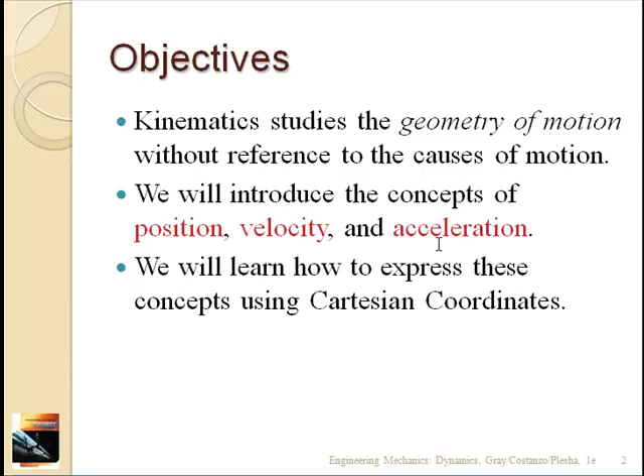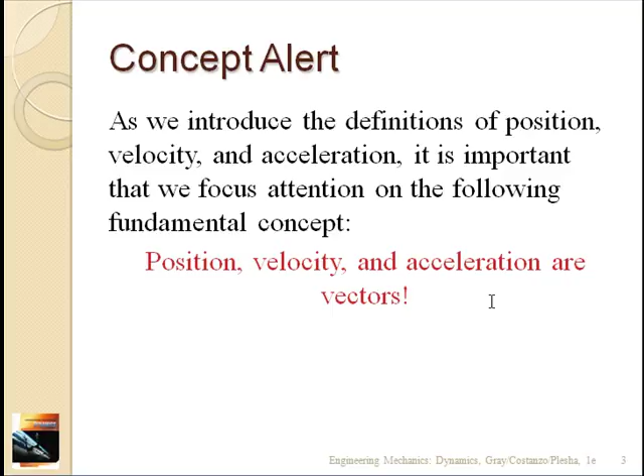So kinematics studies the geometry of motion. So really what we want to be able to do is determine the position, velocity, and acceleration of any particle. And one thing to keep in mind is that these are all vectors. So they all have a magnitude and a direction. So the position of a particle, its velocity, and acceleration all have magnitude and direction, and you have to keep that in mind. We'll talk about speed later, and speed is the magnitude of the velocity. So speed doesn't have a direction, but velocity does.

Now we're going to need to deal with time derivatives a lot. The derivative of the position vector is the velocity vector, and the derivative of the velocity vector is the acceleration. So we'll deal with those constantly. So we just want to get the notation right. So if we have some function f, df/dt we'll call f dot, and that's the first time derivative. The second time derivative is f double dot. The third time derivative is f triple dot, etc.

So let's start with the position vector. So the position vector is provided in some kind of coordinate system. So in this case, we'll have an xy coordinate system with unit vectors i and j in the x and y directions respectively, an origin at point O. And we want to be able to describe the position of a particle at any time. And so what we use is this vector from the origin to the particle, and it's a function of time. So if we know this vector r as a function of time, we'll be able to identify the position of the particle at any time. And if we can do that, and we can take some time derivatives, we'll be able to specify velocity vectors and acceleration vectors just by differentiating the position.

So r is our position vector for particle p. If we want to break that into the horizontal and vertical components, x sub p is the x coordinate of the position vector, and y sub p is the y coordinate. So this position vector r can be broken up into the x and y components, x sub p of t multiplied by the unit vector in the i direction plus y sub p of t multiplied by the unit vector in the j direction. Okay, so x sub p and y sub p are the coordinates of p. If we want to know the distance from the origin to the particle at any time, we can just take the magnitude of the position vector, which is the square root of the sum of the squares of the individual x and y components.

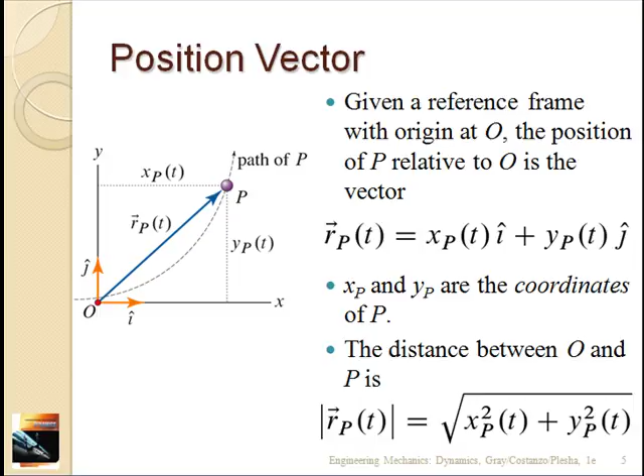So then we'll talk about trajectories. So the trajectory of a point is the line traced through the space point by point. It's sort of like if the particle leaves a trail as it moves, then that would mark out the trajectory. Okay, so the position vector is a straight line from the origin to the particle, but the trajectory is the path it takes to get there. So if we just know the position vector at a specific time, it doesn't tell us anything about how the particle got there, but the trajectory does. So this dotted path is a trajectory, and if we know what that is, we can kind of trace out in history where the particle has been. Okay.

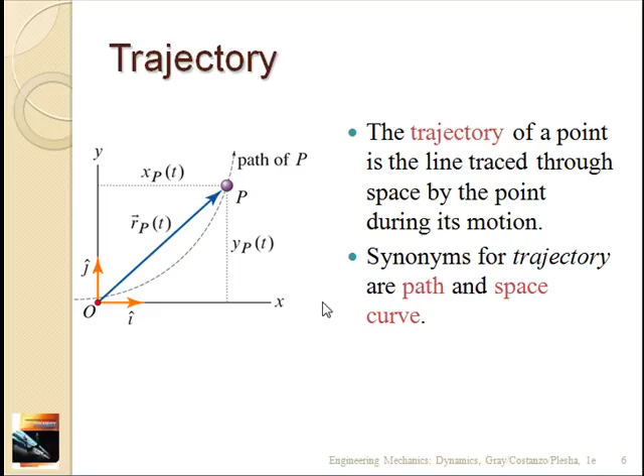So now we'll talk about displacements and average velocity. So the displacement between two different times is the change in position, right? So if we look at this particle p, at time ti, particle p was here. At time tj, particle p has moved to here. So we have position vector r of ti that denotes this position, and r of tj, which denotes this position. And the displacement is the change. So it's this delta r here. It's the vector connecting where it was at ti and where it is at tj. Okay, so the displacement just tells you the change from one time to another. It doesn't tell you again how it got there. So if this was our trajectory, the displacement vector is independent of that trajectory. It's just the vector between these two positions.

All right, so delta r as a function of two times, ti and tj, is the change in position or the difference between the two position vectors. The average velocity over that time period is the displacement or the change in position or the distance traveled divided by the time, right? And the distance traveled, because we just draw this straight line between these two positions, is delta r. It's just the change in the position, right? So delta r here divided by the time it took to make that change, so tj minus ti. So it's like delta r over delta t. So that's the average velocity.

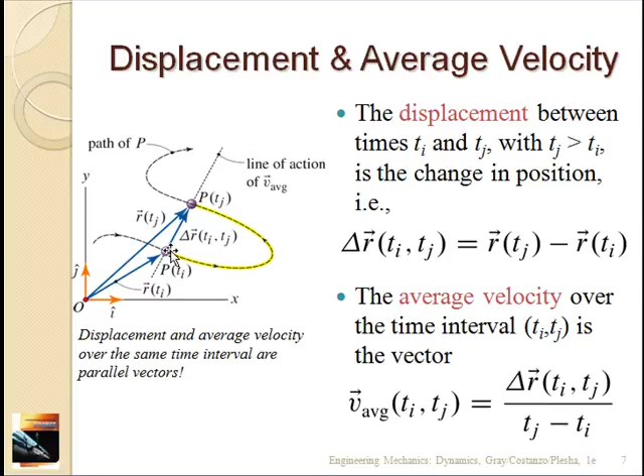Okay, so the distance between the two positions, p of tj and p of ti, is the magnitude of the displacement vector. Okay, so it's the magnitude of delta r. So the distance traveled during the time interval is the length of the yellow curve, right? So the displacement is just this delta r, but the distance actually traveled has to take into account the trajectory, and it's the length of this curve, which is highlighted in yellow here.

Okay, so that's the distinction between displacement and distance traveled. Displacement is just the straight line, it's a change in position from one time to another. And the distance traveled takes into account how you got there, and it takes into account how far you actually traveled.

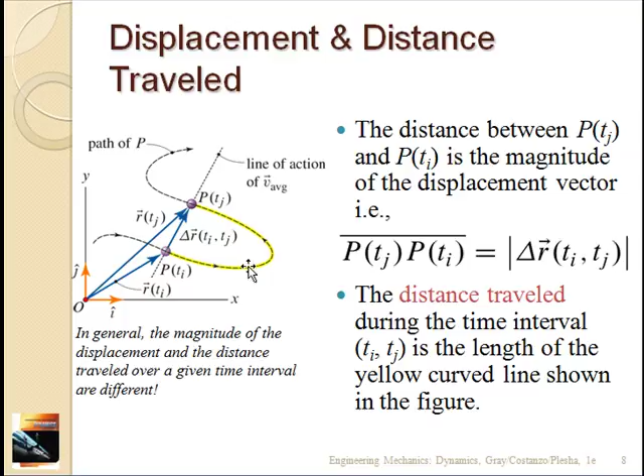So the velocity of the particle is defined as the limit, as delta t goes to 0, of the average velocity between some time t and some later time t plus delta t. Okay? But if you look at the limit as delta t goes to 0, then this displacement or this trajectory will be a straight line if delta t is small enough, or can be approximated as such. And so if you work it out, the velocity is just the time derivative of the position, okay, or r dot. I said that before, but now we have derived it, at least in a crude fashion.

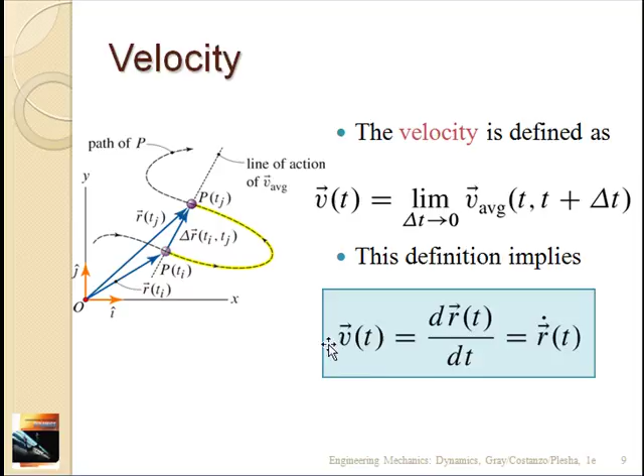Okay, so the main thing here is that if you know the position vector is a function of time, you take the time derivative and you get the velocity vector. Remember, velocity is a vector, so it has magnitude and direction. Okay, and so speed, as I said earlier, is the magnitude of the velocity. So speed tells you how fast you're going, but it doesn't tell you the direction. It's always positive. Okay, so speed is a scalar, velocity is a vector.

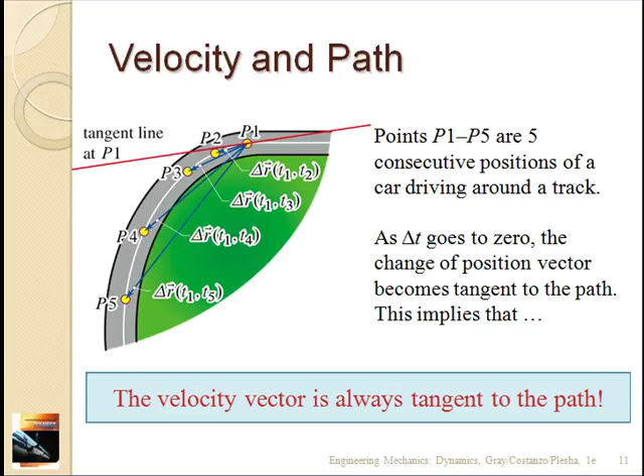And if you just think about the limit as the change in time goes to 0, you'll notice that the red line represents the tangent to the curve, and the change in position will be along that tangent. So the moral of this story is that the velocity vector, which is proportional to that change in position, is always tangent to the path. So if you're going around a curve at any point, the velocity vector is tangent to that trajectory. And that's an important thing to remember as we go through all this.

So once we work out velocity, then we're interested in the acceleration. Acceleration is the time rate of change of velocity. Since the velocity is a time rate of change of position, then the acceleration is the second derivative of the position. So if we know the position vector is a function of time, one derivative gives us velocity vector, two derivatives gives us acceleration vector. So we can write this as v dot or r double dot.

Don't forget acceleration is a vector. And the thing to note here is the acceleration is generally not tangent to the path. So velocity always is tangent. Acceleration is generally not. It can be, but it isn't necessarily.

So let's look at a simple example. So we have an XY coordinate system here and some particle P which is traveling on the trajectory denoted by this dotted line. So this is the path of particle P. And at points A, B, and C, the velocity vectors are noted. So right here, the velocity is tangent to the path, and so it's in this direction. At point B, it's tangent, so now it's in this direction. At point C, it's tangent, it's this direction. Somewhere over here, the velocity vector would be perfectly vertical because the tangent is vertical.

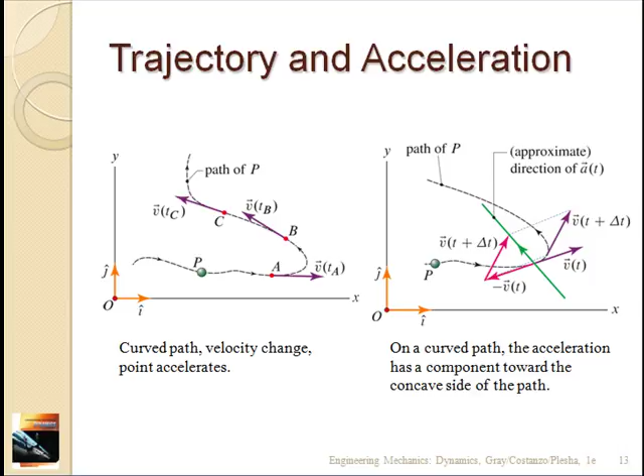All right, so we can work out velocity, speed, and acceleration in Cartesian coordinates. If we know x of t and y of t, the x and y coordinates of the position vector, then the velocity is just x dot times the unit vector in the i direction plus y dot times the unit vector in the j direction. Quite often we'll call x dot vx, the x component of the velocity, and y dot vy, the y component of the velocity. So the velocity vector can be written as vx times the unit vector in the x direction plus vy times the unit vector in the y direction.

So the speed is just the magnitude of this vector, the square root of the sum of the squares of the velocity components in the x and y direction. We can write those as x dot and y dot, so it's the square root of x dot squared plus y dot squared. The acceleration is x double dot times the unit vector in the x direction plus y double dot times the unit vector in the y direction, which is vx dot times i hat plus vy dot times j hat, or ax times i hat plus ay times j hat. So it's the acceleration in the x direction times the unit vector in the x direction plus the acceleration in the y direction times the unit vector in the y direction.

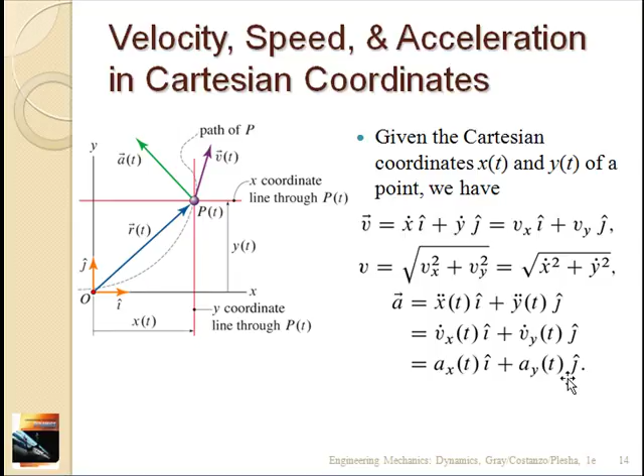So let's do one quick example to walk through some of this. The idea here is we have a couple of ships in the ocean. There's ship A, oriented with the x-axis in the A coordinate system perpendicular to the ship and the y direction along the ship axis. And then there's ship B with its x coordinate along the axis of the ship and the y coordinate perpendicular to the ship. Each has their own coordinate system, and we can look at position, velocity, and acceleration in each of these coordinate systems.

Ship A has launched some projectile P in its own x direction, the xa direction. So P is flying along this. The position vector for P in the A coordinate system is given as 2.35 t cubed times the unit vector in the xa direction, and the units are meters. Relative to the B coordinate system, this thing's flying at an angle, and in the B coordinate system that position vector has an x component and a y component. So in the A coordinate system it only has an x component, but in the B coordinate system it has an x and a y.

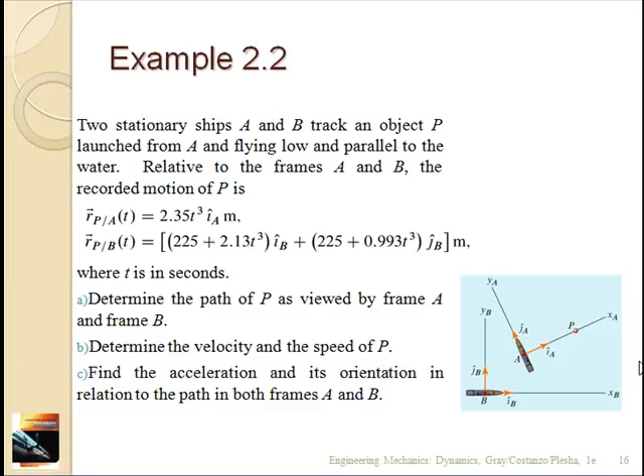We solve the first for t: t cubed is xPB minus 225 over 2.13. We stick that in for t and, working out the math, we get yPB is 120 plus 0.466 xPB. That's a straight line in the B coordinate system with a slope and an intercept. If you're sitting on boat B, you see this thing flying in a straight line, but not along either the xB or yB axes; it's going at an angle. So to get the path of a particle when you know the x and y coordinates, you just eliminate time, and it gives you a function of x and y.

All right, so if you're sitting on B, then you see the projectile moving in this angle, and that's the path. All right. So part B, we want to know the velocity and speed. So if you're sitting on boat A, then the velocity is just r dot, and r from boat A just has one coordinate system. It's going in the XA direction. So you differentiate the position vector, and you get 7.05 t squared times the unit vector in the XA direction, and the units are meters per second.

In B, we have both an x and y coordinate, so the velocity of the particle P in the B system is the time derivative of the position vector in the B system, and there's an x and y coordinate. So you just take the time derivative term by term, you get 6.39 t squared times the unit vector in the xB direction plus 2.98 t squared times unit vector in the yB direction.

To get the speed, it's just the magnitude of these. Since this only has an x coordinate, then it's pretty trivial to find the magnitude. It's just 7.05 t squared. So the velocity is increasing like t squared, so it's ramping up pretty quickly, and the units are meters per second. In the B system, you have two components, so you have to take the square root of the sum of the squares. So we do that, and we end up with the same thing, 7.05 t squared.

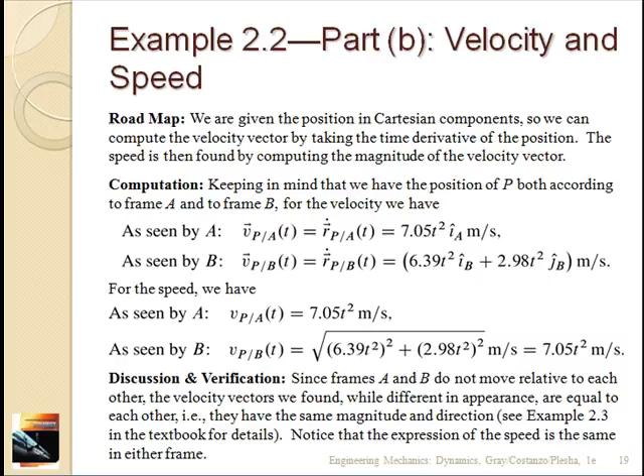And finally, we want to work out the acceleration. Again, we're just taking time derivatives. So the acceleration in the A coordinate system is just the time derivative of the velocity in the A coordinate system. And again, there's just one component, so we just take the time derivative, and we get 14.1 t times the unit vector in the A direction, and the units are meters per second squared.

In the B coordinate system, and this should say as seen by B, the acceleration of P relative to B is just the time derivative of the velocity vector, and that has two components. You differentiate term by term, you get 12.8 t times the unit vector in the x direction plus 5.96 t times unit vector in the y direction for B. Okay, same units. We just have two components here because the thing is accelerating off at an angle.

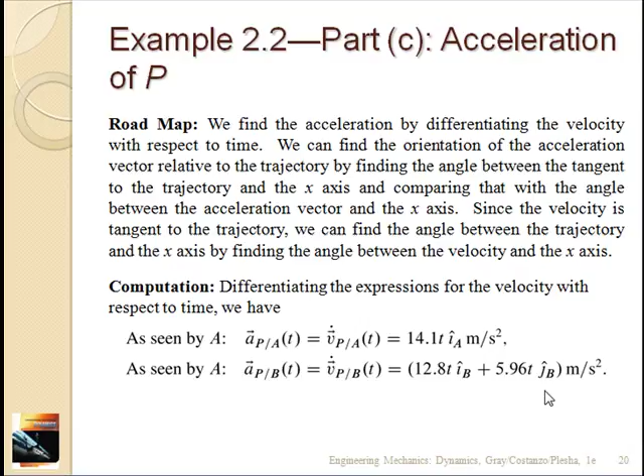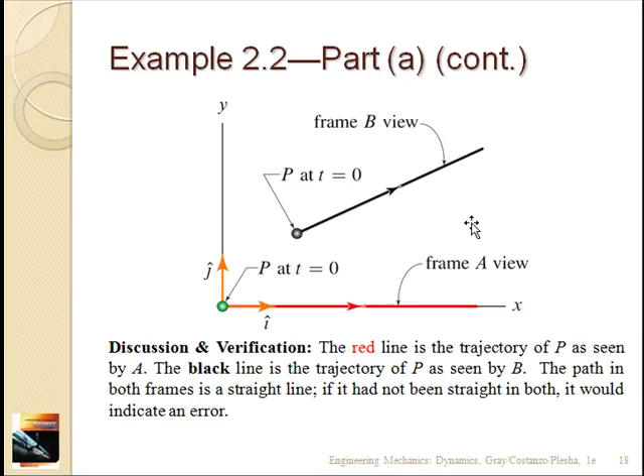So if we take the ratio of the y component of the velocity to the x component of the velocity, that'll tell us the tangent of this angle. If we take the arctangent, then it'll get us the angle, right? So you can find the orientation of the trajectory by taking the ratio of the y and x components. So that's what we're doing here. We're taking Vy over Vx, and then we're taking the inverse tangent to get the orientation angle.

Vy is 2.98 t squared. Vx is 6.39 t squared. The t squareds cancel, and so we get the tangent inverse of 2.98 over 6.39. It comes out to 25 degrees, and it's independent of time. So the orientation is at 25 degrees from the horizontal,

and that's its orientation. For the acceleration, we just take the ratio of the components of the acceleration vector, ay and ax. Again, the t's cancel, and in this case, the acceleration is tangent because it's a straight line path, and so we also get 25 degrees for the acceleration. So we know the magnitude of the acceleration, the magnitude of the velocity, we know the orientation. We pretty much know everything we need to know about that particle in the two coordinate systems A and B.

All right, so that's it. Hopefully that'll help you work out some of the homework problems.